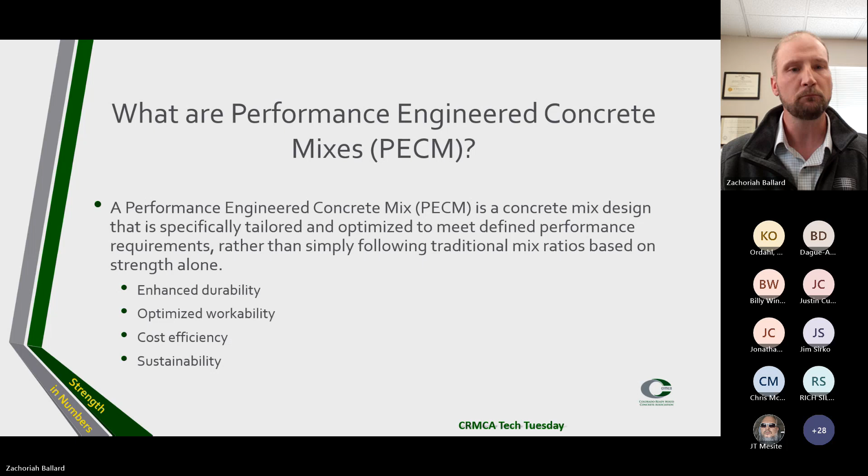So we'll start with the traditional concrete mix design. Generally, we're taking one of these, adding two of these, adding three of these, water to get slump, and we get concrete.

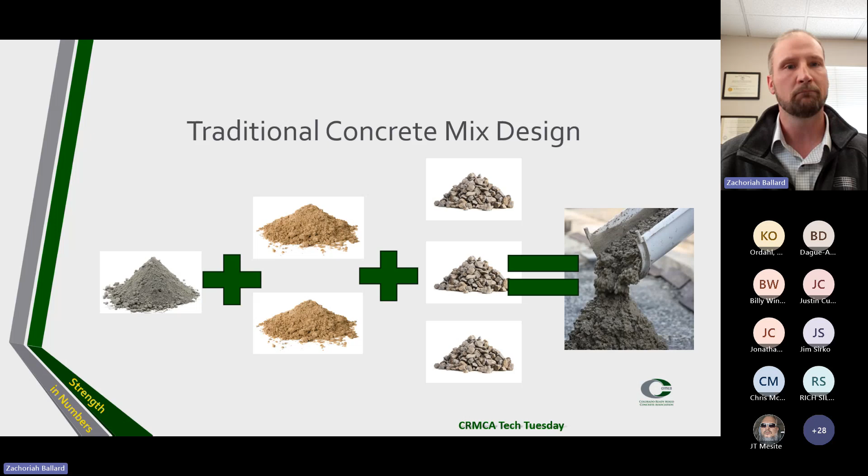We also have our traditional mix design of ACI 211, which is selecting proportions for normal density and high density concrete as a guide. This generally goes through a maximum water cement ratio with minimum cementitious materials, air content, slump, nominal max aggregate size, and strength.

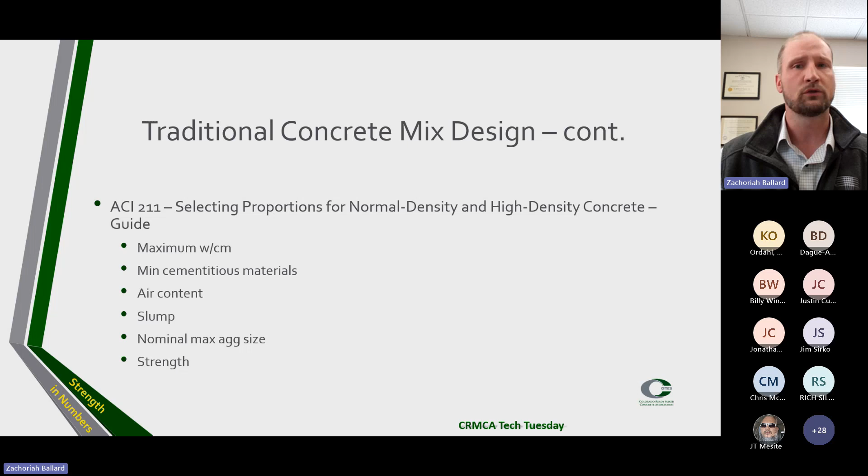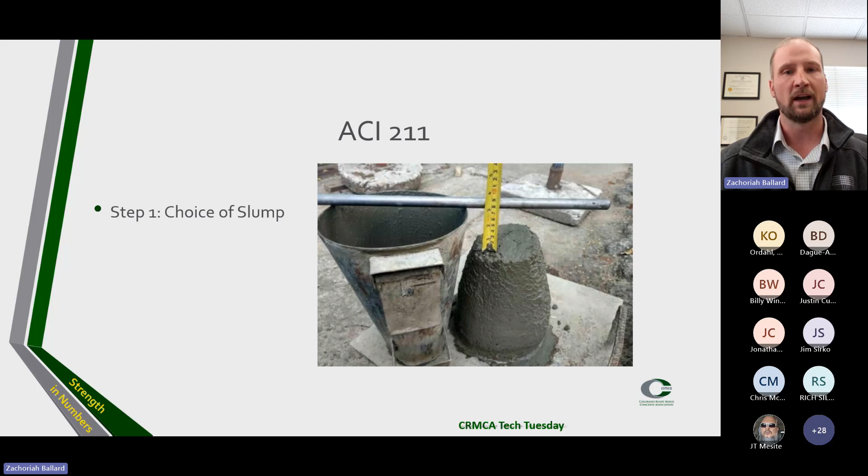So for ACI 211, we're going to go over a real quick, basic introduction of how that mix design process goes. The first step is our choice of slump. If slump's not specified, a value appropriate for the work can be selected from Table 5.3.1 in the document. Those values apply to concrete produced without a water-reducing admixture, and these slumps range anywhere from 1 inch to 5 inches.

Our second step here is choice of nominal maximum aggregate size. Generally, the nominal maximum aggregate size should be the largest that is economically available, consistent with dimensions of the structure. Now understand that most of the suppliers, we don't really have the choice of choosing many different options here, but we may have a couple of options.

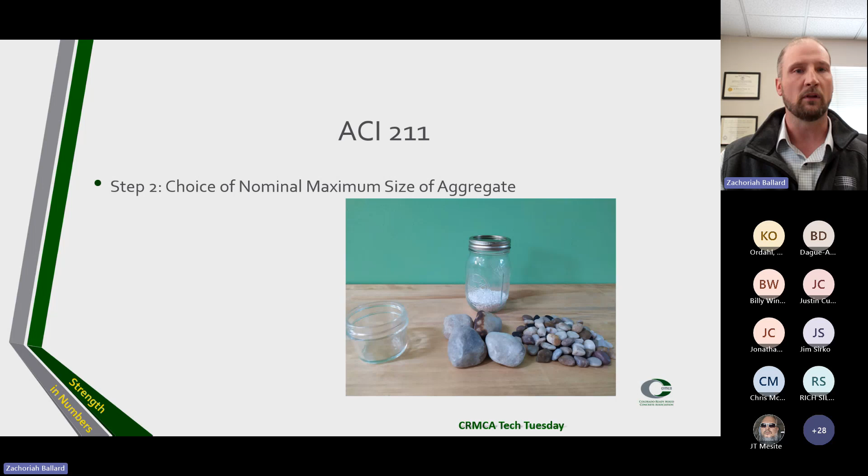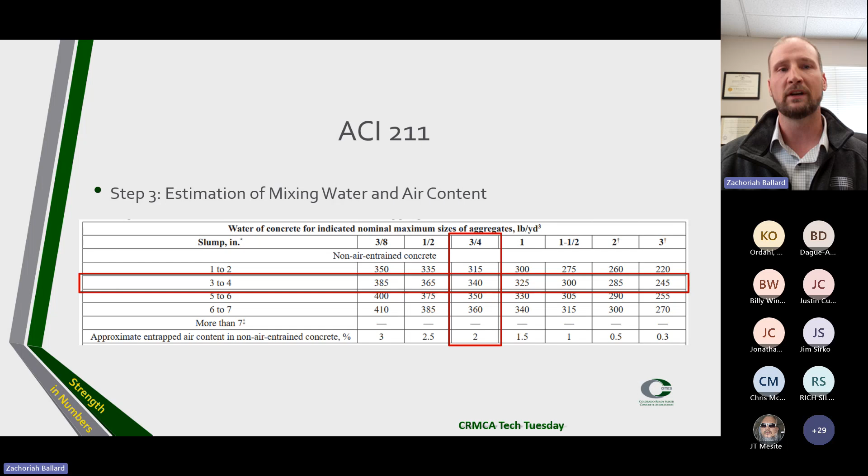So our third step is the estimation of mixing water and air content. For this example, we're going to do the line here highlighted, the 3 to 4 inch slump with a 3/4 inch aggregate. That's giving us a starting water of 340 pounds per cubic yard.

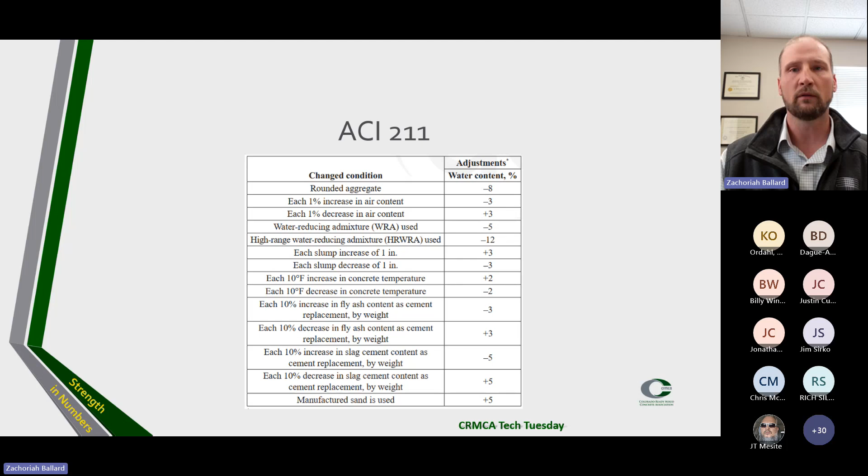We then go to the next table in ACI 211. This gives us adjustments that we can use for rounded aggregates, increases or decreases in air content. We can go through this chart and adjust our mixing water content based on the properties of the materials we're working with. For this example, we're not going to do any of those, but know that that's available to us.

Step 4 is the selection of our water cement ratio. The required water cement ratio is determined not only by strength requirements, but also factors such as durability. Because different aggregates and cementitious materials may produce different strengths at the same water cement ratio, it's desirable to develop the relationship between strength and water cement ratio for the materials to be used.

So our example here, we're going to do a 5,000 PSI concrete, non-air entrained. That gives us a starting water cement ratio of 0.48.

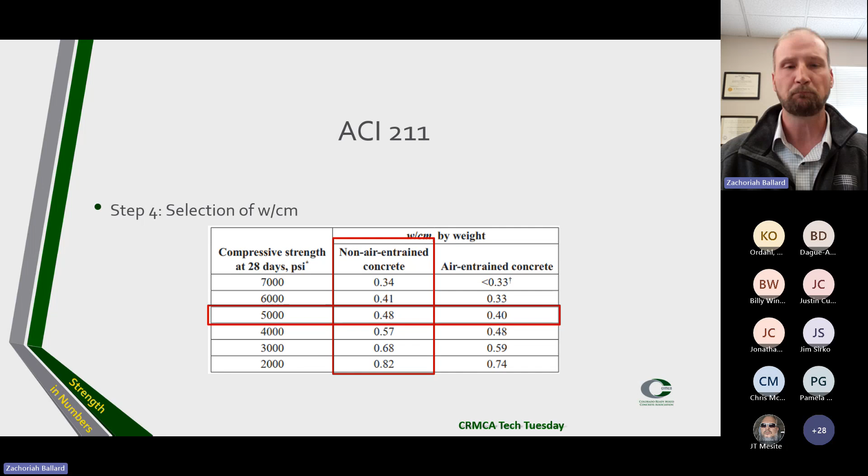Our step 5 is the calculation of the cementitious materials content. So we're going to take that 340 pounds of water, divide it by our water cement ratio, and we get a starting cement content of 708 pounds. The quantity of cementitious materials per unit volume of concrete is fixed by the determinations made in steps 3 and 4, and the required cementitious materials, we divide that out.

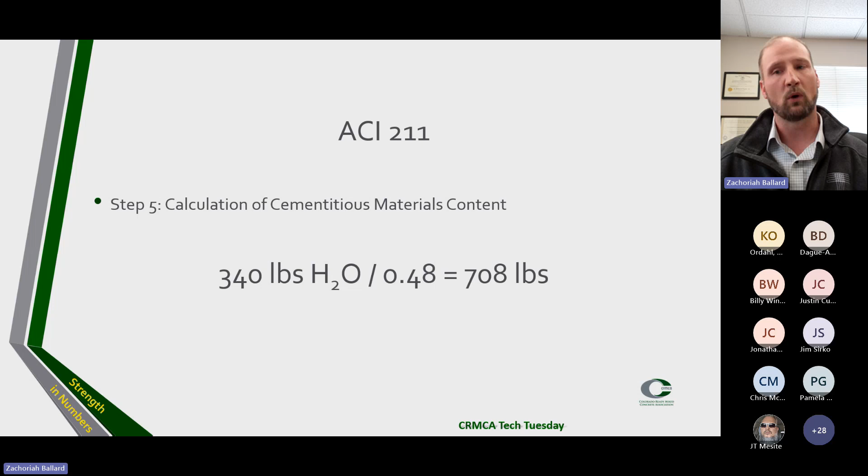If, however, we have a specification that includes a separate minimum limit on cementitious materials, in addition to the requirements for strength and durability, the mixture should be based on whichever criterion leads to the larger quantity of cementitious materials.

So our step 6, estimation of coarse aggregate content. Aggregates of essentially the same nominal maximum size and grading will produce concrete of satisfactory workability when a particular volume of coarse aggregate on an oven dry rodded basis is used per unit volume of concrete. The appropriate values for this aggregate volume are given in Table 5.3.6. The bulk volume of aggregate needed, we're going to use 3/4.

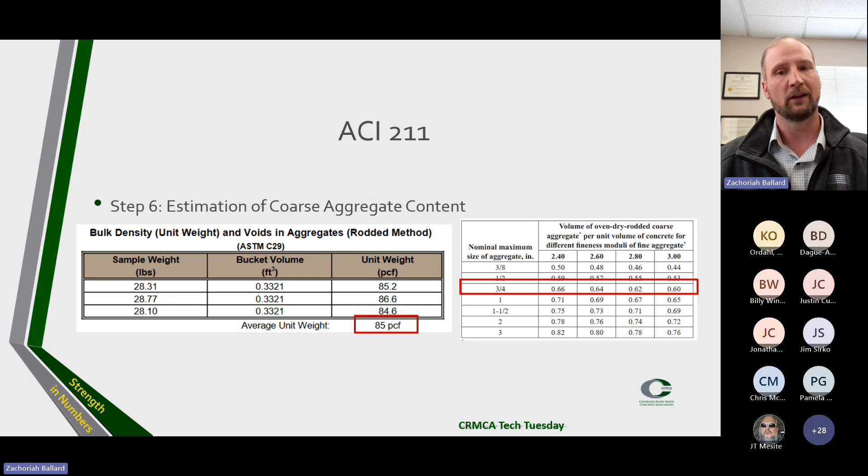This value is multiplied by 27, converted to a dry unit weight by multiplying by the bulk volume. We then convert that to an equivalent SSD weight by multiplying by 1 plus the absorption, using values here of 0.64. So all together, we use our 85 pounds per cubic foot, multiplied by 27, multiplied by 0.64, multiplied by a factor for our absorption, gives us our starting aggregate content for our mix, in pounds per cubic yard.

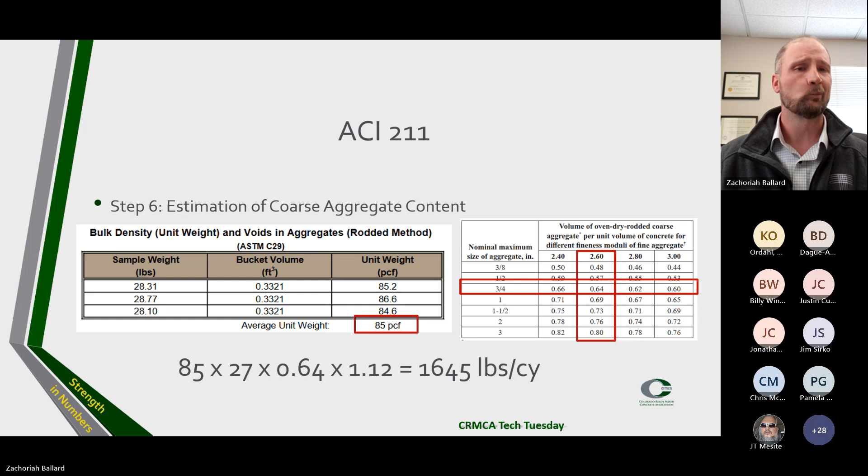Our step 7 is estimation of the fine aggregate content. At the completion of step 6, the weights of all the ingredients of the concrete mixture have been estimated, except the weight of the fine aggregate. Calculating the required quantity of fine aggregate involves use of the volumes displaced by the other ingredients. In concrete, the volume occupied by any ingredient equals its weight divided by the density of that material, the latter being the product of the density of water and the specific gravity of the material.

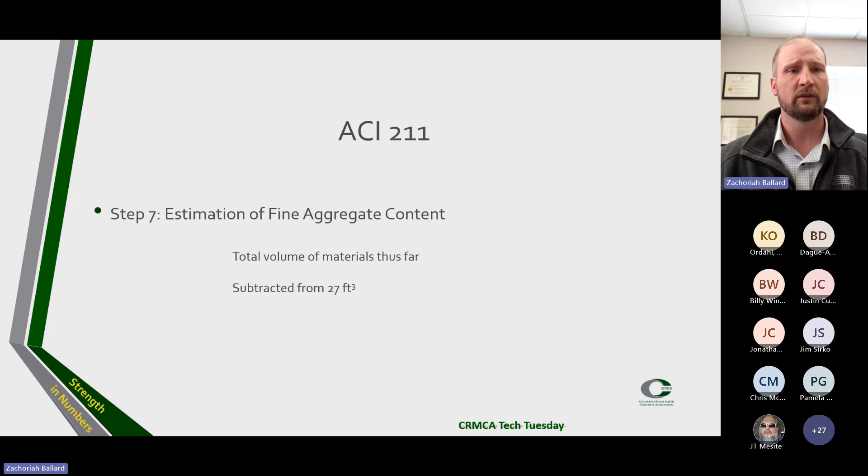For this calculation, the total volume displaced by the known ingredients—the mixing water, the air, cementitious materials, coarse aggregate—is subtracted from the unit volume of concrete, 27 cubic feet, to obtain the required number of cubic feet of fine aggregate. So I saved some of our math here, and our total volume of materials subtracted from 27 equals our required volume of sand, which is 1,170 in this particular case.

So our step 8 is the design weight summary. We have cement at 708, water at 340, coarse aggregate at 1,645, and fine aggregate at 1,170. And that's the mix design we take to the lab.

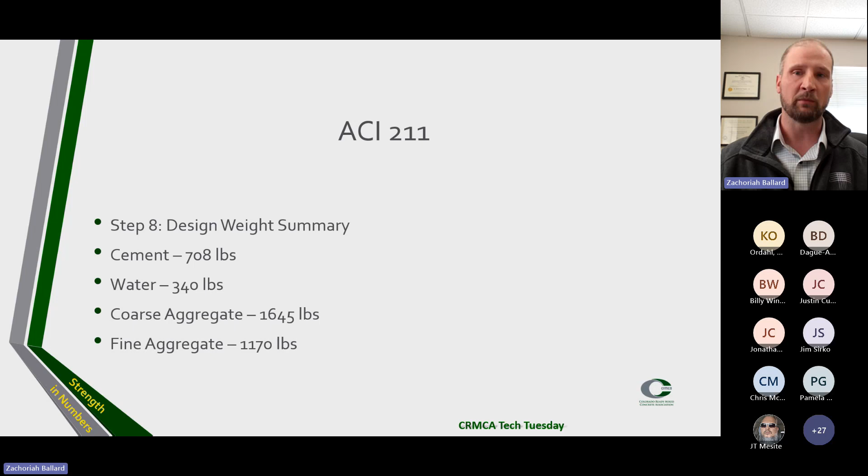Then we need to do it 2 more times at varying water cement ratios to develop a 3-point curve. Using a 3-point curve, we can then pull out a design water cement ratio and interpolate the mixture proportions for our design mix. That looks like: as we come across from our design strength until we hit our strength curve, we drop that down to our water cement ratio at the bottom, and we can interpolate our values for a design mix.

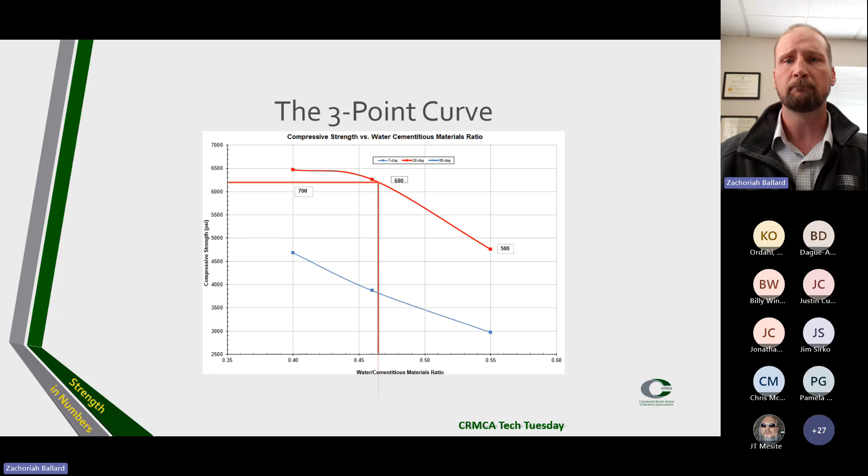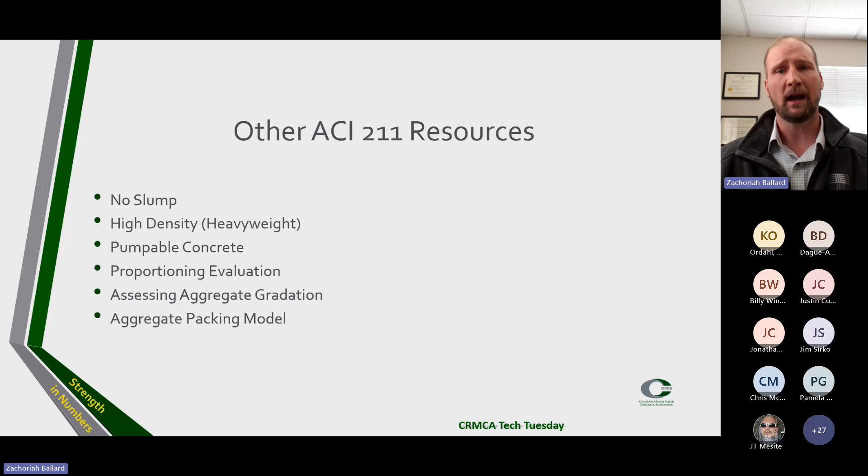Some other ACI 211 resources that we have—I don't want it to sound like the ACI 211 proportioning isn't still valid or the methodology is bad. It's still very useful, and we have a host of other documents we can use as well. We have our no-slump proportioning, our high-density heavyweight proportioning, a pumpable concrete proportioning document, a proportioning evaluation document, assessing aggregate gradations, an aggregate packing model, and proportioning with ground limestone and mineral fillers. I should also mention that lightweight aggregates and proportioning is covered in ACI 213 and ASTM C330.

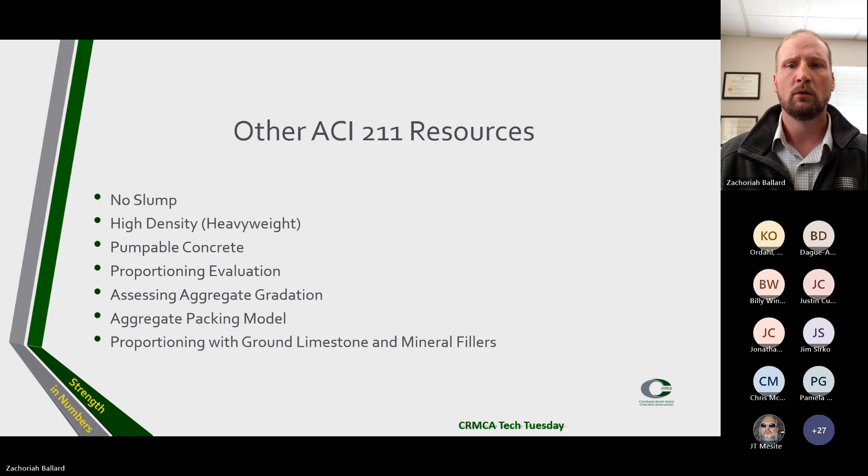So our shift towards performance engineered mixes. We have a demand for improved durability. Modern infrastructure projects require concrete mixtures that can withstand harsh environmental conditions, such as freeze-thaw cycles, aggressive chemicals, and high temperatures. Traditional mix designs often didn't provide the necessary durability. Performance engineered mixes focus on engineering concrete with properties like higher resistance to corrosion, reduced permeability, and improved long-term performance in various environmental conditions.

We have sustainability goals. The construction industry has increasingly moved towards sustainable practices. Performance engineered concrete mixtures allow for the use of alternative materials, industrial byproducts like fly ash, slag, silica fume, etc., that reduce the environmental footprint of concrete production. These materials help reduce the overall carbon footprint, energy use, and waste generated during construction.

We have technological advancements. Advances in concrete testing and modeling have made it easier to predict how different mixtures will perform in real-world conditions. Computational tools and mixed and performance-based testing methods allow engineers to design concrete mixes tailored to specific project needs, leading to the creation of more effective and efficient mixtures.

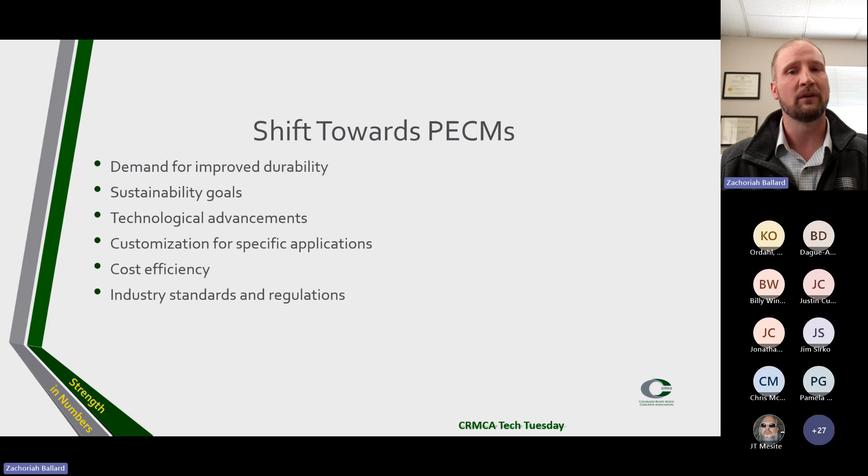Industry standards and regulations. Changes in building codes and regulations have pushed the industry towards a more performance-based approach. As codes and standards become more stringent, especially with regard to environmental and durability concerns, performance engineered concrete mixtures provide

a way to meet these requirements while also ensuring that the concrete structures perform optimally over time.

Focus on long-term performance. There's an increasing emphasis on the life cycle performance of concrete structures. Instead of focusing solely on initial cost or ease of mixing, the industry has shifted towards designing concrete mixtures that

perform better over the life of the structure, reducing the need for repairs and replacements. PECMs align with this trend by ensuring that concrete mixtures meet long-term performance objectives such as longevity and minimal maintenance.

Better understanding of concrete properties. Through extensive research and testing, the construction industry has gained a better understanding of how various materials and admixtures interact to influence concrete properties. This knowledge enables the creation of tailored mixes that achieve desired performance characteristics, such as workability, strength, durability.

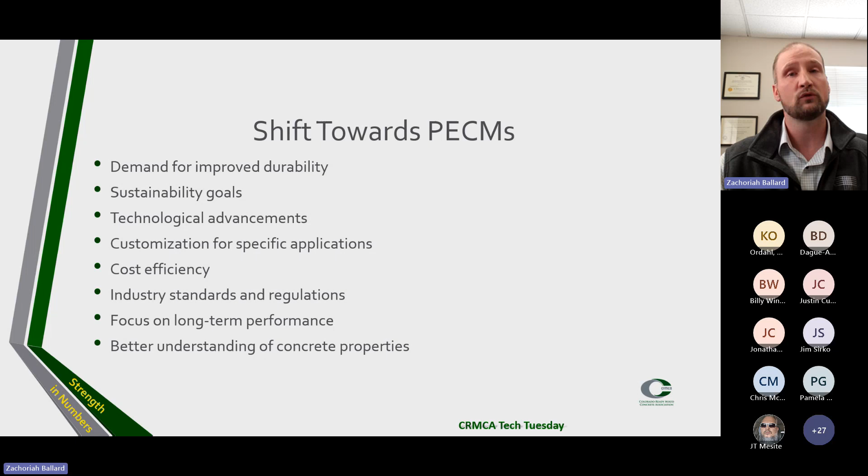So we'll go into composition and ingredients. Our cementitious materials or fillers: fly ash, slag, silica fume, natural pozzolans like clay or calcined shales, ground glass pozzolans, limestone powders, ceramic waste powders, biochars. We've got a lot of different options.

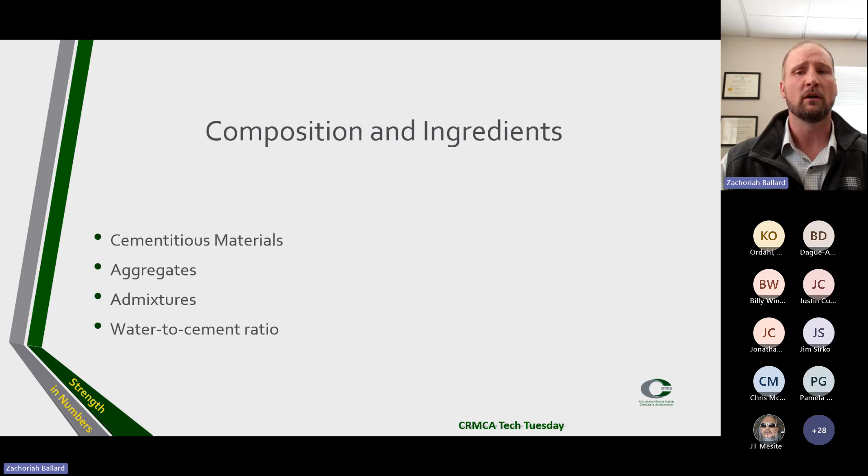We've got aggregates - the importance of aggregate quality, size distribution, and shape in mix performance. Admixtures: water reducers, high-range water reducers, kind of the low range are retarders, superplasticizers, set accelerators, viscosity modifying admixtures, the list kind of goes on - waterproofing admixtures, pumping aids, etc. And still our old standby, the water cement ratio and its impact on our workability, strength, and durability.

So before we delve into different types of materials, we want to discuss a little of our typical batch plant and some of the constraints. We can see a simplified schematic of a concrete batch plant. We've got powder silos on the left side of the screen, and we've got our aggregates on the right side. Many of these plants, I'm sure that many of our suppliers are using, generally have 2 to 3 silos, 2 to 3 aggregate bins. So we have some constraints that we're also working with here.

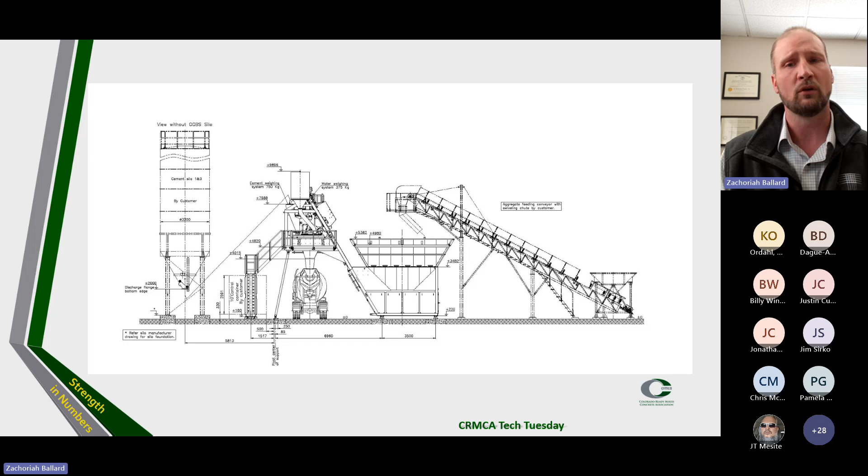It would be nice to be able to put 5 to 10 of those powders that we just talked about, or a multiple amount of aggregates in our plant to be able to use these however we want. But that's just not the reality of what we're dealing with. We do have some ability - the little platform above the concrete mixer truck there, I'm sure most of us have been in a situation where we've stood on top of those and loaded mixers with different materials by hand or by small materials, but that's not generally a long-term or sustainable solution for something that we're going to have to do for a couple hundred yards a day.

So our cementitious materials - we've got cement and fly ash and blast furnace slag and silica fume and natural pozzolans and ground glass pozzolans, limestone powders, ceramic waste powders, biochars. We have many different options when it comes to powder materials, whether it be from cementitious materials, supplementary cementitious materials, which provide some pozzolanic reaction, and mineral fillers.

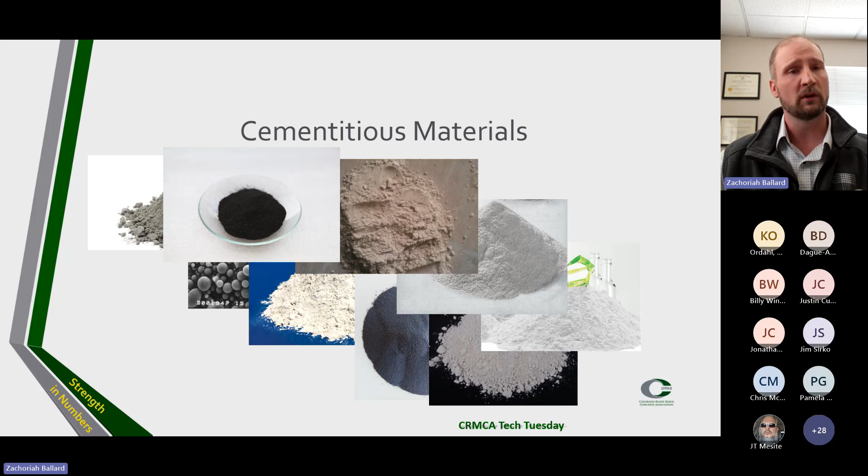So our space in the concrete plant certainly cannot accommodate every single one of these, or even a multiple of these. And some of these may not even be available in certain markets. So we may end up with some of our cement industry folks blending some of these materials for us and being able to provide cements that look more like the European model, where instead of having a handful of cements, we may end up with a multitude of cements with different materials blended into each of these. And we're starting to see some of this go on already, where we have our 1T or 1P type cements. But it may not be a real option for many of our plants to have multiples of these options.

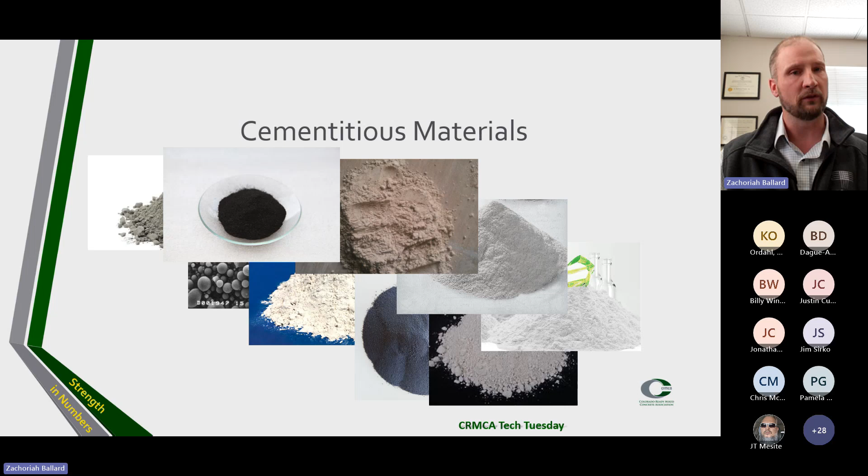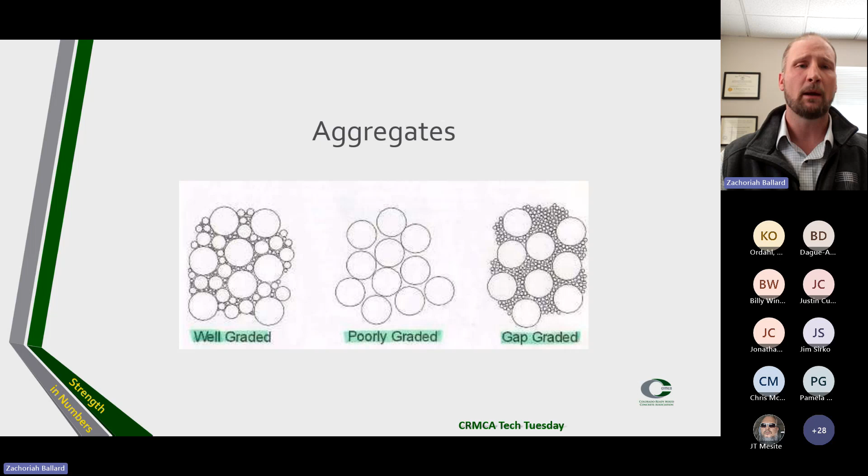We also have aggregates. And we've got our well-graded aggregates, our kind of well-distributed size of aggregates. We have poorly graded aggregates. We have gap-graded aggregates. Our gap-graded aggregates is kind of where our traditional concrete mix design tends to live.

We have our requirements by ASTM C33 that gives us a certain size range that say, number 67 rock can meet. We have a certain size range that our sands can meet, and generally those two materials put together give us a gap-graded aggregate. Our performance concrete mix designs are going to use more of a well-graded aggregate or a better distribution of aggregate sizes.

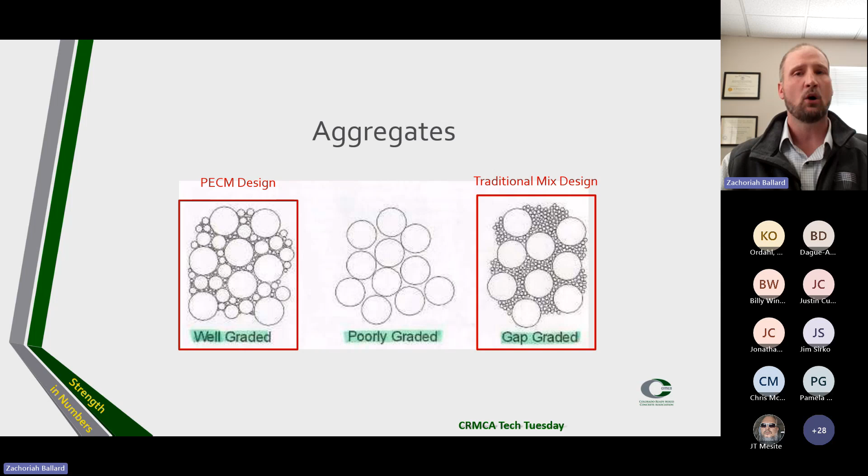There's a lot of different research out on how we can combine these materials. One of those being a coarseness factor, workability factor chart, or kind of the Shilstone workability chart. And this started kind of in the late 1980s or so.

James Shilstone revealed a mixture design process based on the proportioning of aggregates using a combined gradation to proportion a group of sieve sizes that can be categorized as coarse, intermediate, and fine. He designed a chart and proportioning equations from about 20 mix designs based in Saudi Arabia, and confirmed the chart and equations using aggregates from the Dallas, Texas area.

From Shilstone's experiences, he determined the workability can be sufficient in certain areas of the chart, and divided the chart into zones - we have zone 1, zone 2, zone 3, zone 4, and zone 5.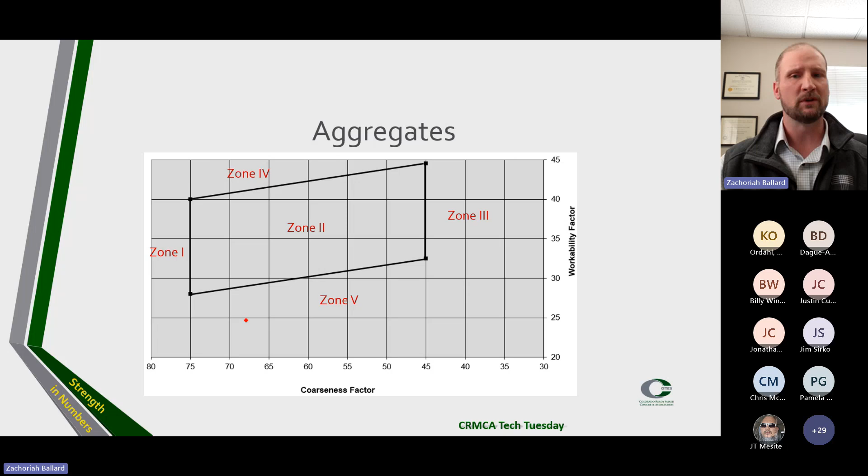So we plot our aggregates based on a coarseness factor and a workability factor. These are generally just materials retained on the 3/8 sieve, a number 8 sieve, and material passing a number 8 sieve, and our cementitious content. It only uses a handful of factors from those, and our zones give us different qualities about our concrete mix designs.

Our zone 1 is supposed to be our gap graded, with very little amounts of intermediate aggregates. Zone 2 is supposed to be our well graded aggregates, in what he called an optimal gradation for concrete mixture design. Zone 3 has a large majority of intermediate with very little coarse aggregate. Zones 4 and 5 correlate to the extreme sandiness and rockiness ends of aggregate gradations.

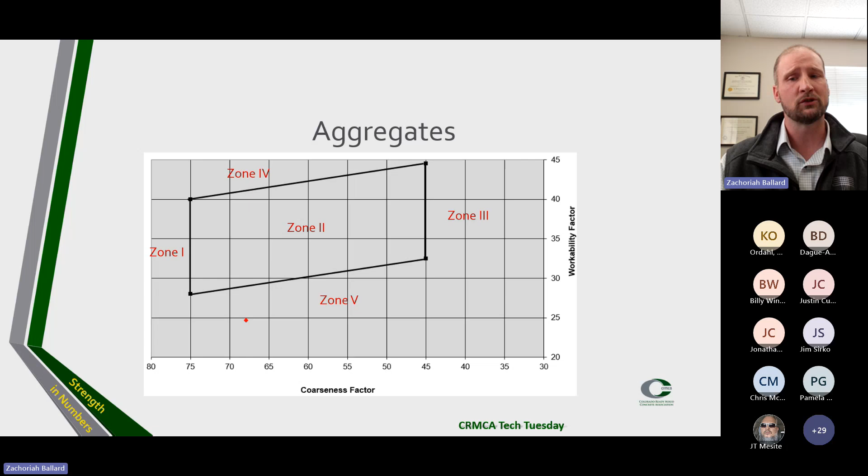A large focus has been used on multiple regions of zone 2 for certain applications, and many DOTs are using this for aggregate proportioning in slip-form pavements. However, Shilstone suggested the bottom of zone 2 is best in that zone. Unfortunately, very little testing has actually been published by Shilstone or others to validate this chart.

We've got our haystack curve, or individual percent retained chart. This is a method for evaluating the exact distribution of each sieve size on an individual percent retained basis. The chart easily shows the excess or lacking of sieve sizes of a combined gradation.

From experience, people have specified a maximum boundary of somewhere in the range of 18 to 22%, and a minimum boundary of 5 to 12% retained on each sieve. No real research has been conducted to prove those limits, but that's what we've found generally works.

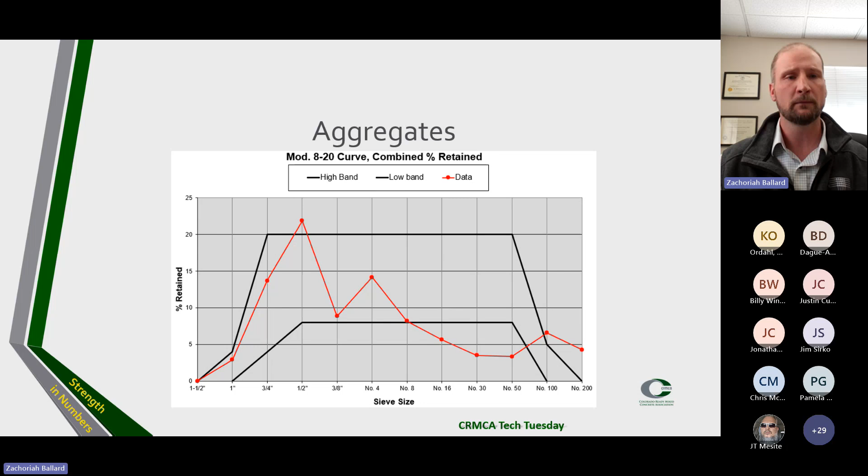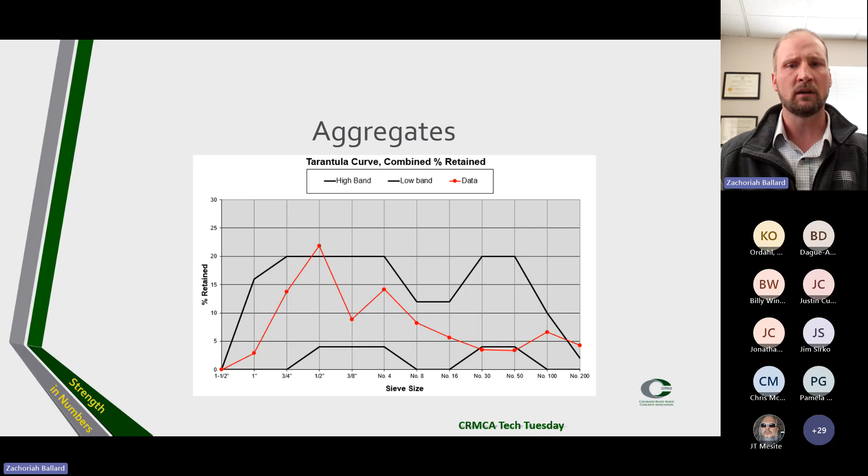We have our modification from that haystack curve to the tarantula curve. Our tarantula curve was modified - this was done by Tyler Ley and his team at Oklahoma State. This work has had quite a bit of research done around it, around 2010 or so, somewhere around in there.

We also have our Power 45 curve. This started in the concrete industry around 1907, and is now used primarily by the asphalt industry. The Power 45 curve uses a combined gradation fit to a best fit along a straight line on the cumulative percent passing chart. This was done by Fuller and Thompson in 1907. The straight line from the origin to the nominal maximum size is thought to represent a maximum density combined gradation, which supposedly creates the maximum density and a minimum amount of voids in a mixture.

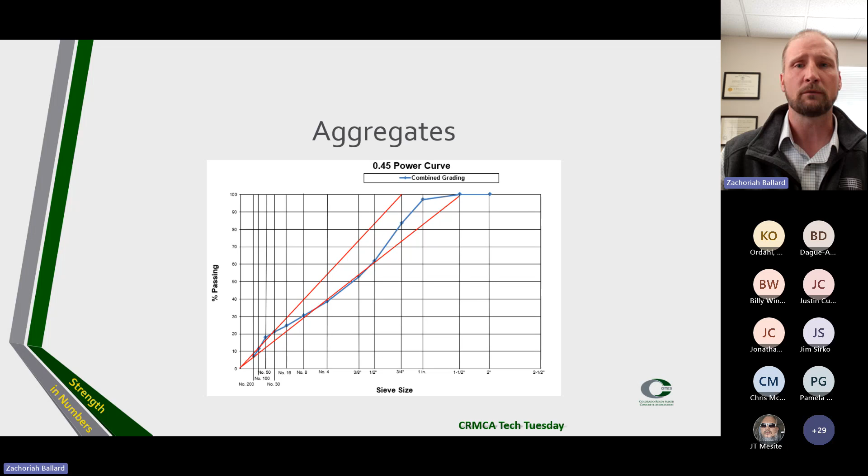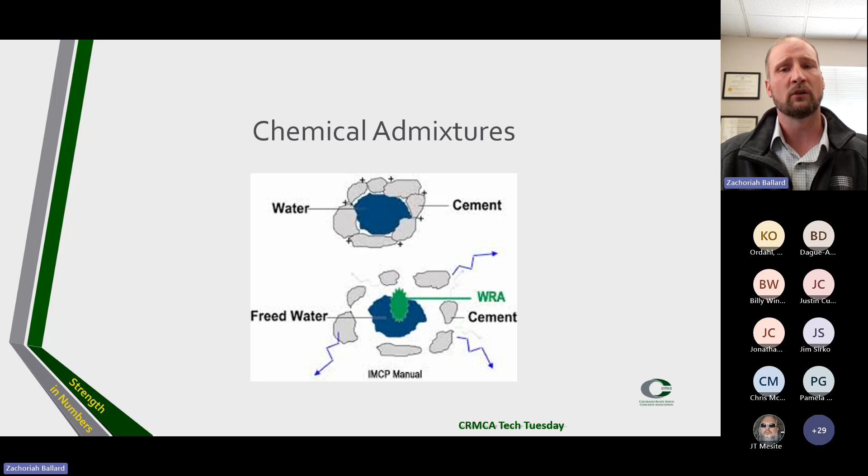Let's delve into our chemical admixtures here. We have a traditional view that chemical admixtures have always been used to reduce the water, which makes our concrete stronger, more durable, and overall just more is better, right? But what we're missing here is we're not talking about sticky concrete or potential slump loss.

We have some charts, generally by admixture suppliers, that show if we have a high range water reducer on the left, we get a larger amount of water reduction, but the time that slump stays is not as long. We have some slump controlling admixtures and slump retaining admixtures, but those are generally not going to give us the same high water reduction values. So as we push admixture dosage higher and higher and reduce our water lower and lower, we're going to start to run into some problems.

If we hit it at the batch plant, we have high water reduction, slump looks good, but if we have high slump loss at the job site, we're just going to add a bunch of water right back into it, and we're going to defeat the purpose of having these admixtures and going through this exercise of the performance engineered mixes.

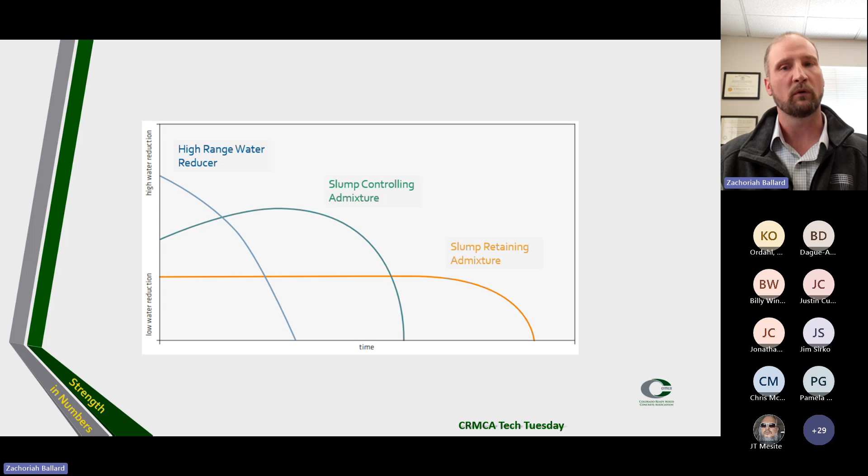So quick background on some of our polycarboxylate ether-based superplasticizers. It's a targeted polymer design to specific concrete properties.

The mode of action is based on the adsorption of the polycarboxylate onto a cement grain, dispersion of particles by electrostatic repulsion, and steric hindrance.

The polymers consist of backbones with carboxyl groups and side chains. The backbone with the carboxyl groups is responsible for the attainable water reduction and initial slump mixing time respectively. The side chains determine the slump keeping capability of the superplasticizer, affected by an increasing number of side chains.

The crucial factor is the limited space for these carboxyl groups and side chains along the backbone. Either a carboxyl group or a side chain can be attached to a certain location. Basic variations in those factors lead to three generic types of polymers: water reducers, slump control, and slump retaining type polymers that we just talked about.

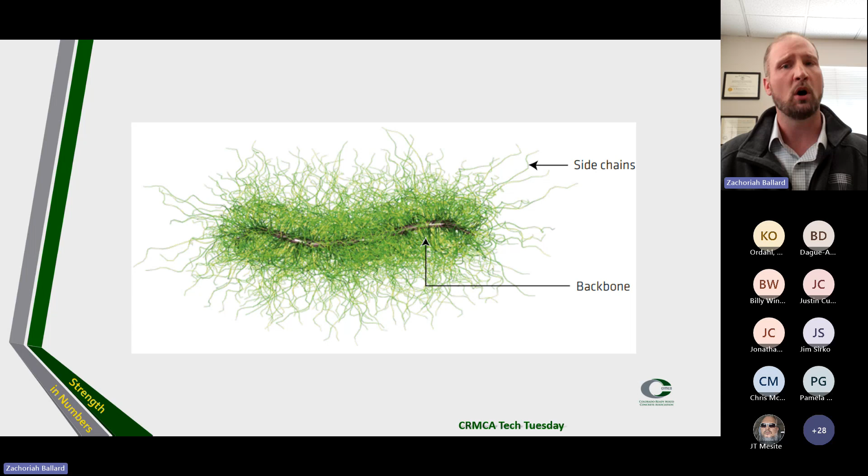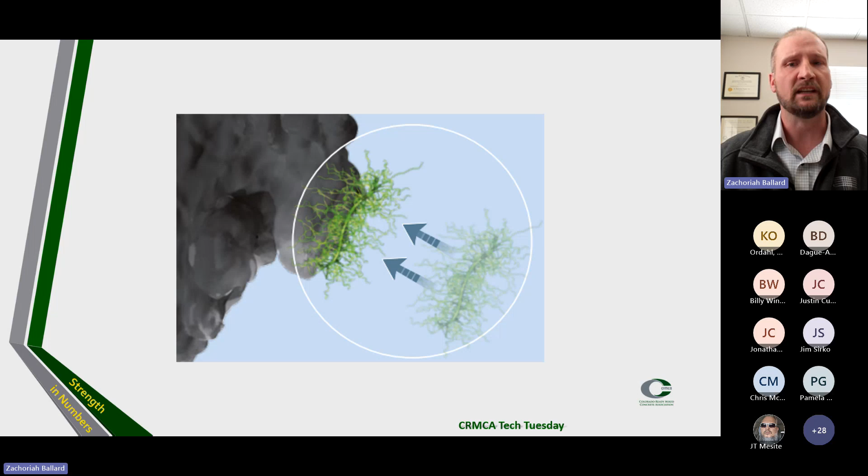So we get the adsorption of the polymer, the backbone, onto our cement grain. This is a detailed view of that adsorption of the polymer onto the cement grain.

The improved workability is due to steric hindrance. Steric hindrance is a slowing of a chemical reaction due to what's called steric bulk. It's usually manifested in intramolecular reactions, and discussion of steric effects often focuses on intermolecular interactions. Steric hindrance is often exploited for controlled selectivity, such as slowing unwanted side reactions like crystalline growth from cement hydration.

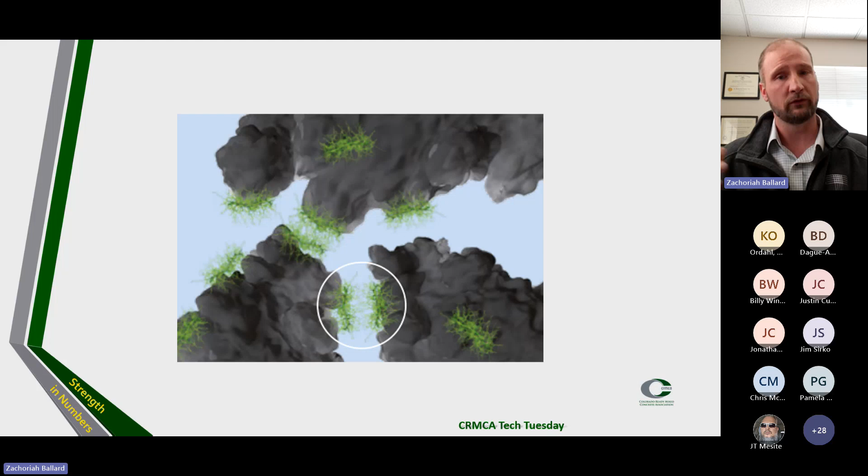This is a detailed view of improved workability. It's going to push those two particles apart without having to add water into the space between them.

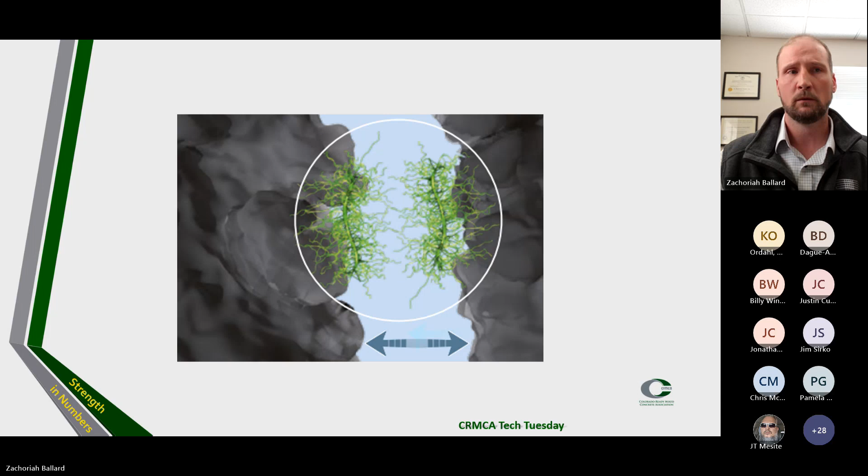So why is all of this important? Well, we understand the materials that we're working with, and we can better understand how to make adjustments with those materials for various outcomes.

We get key performance indicators, things like compressive strength, flexural strength, modulus of elasticity, durability factors like permeability, shrinkage, freeze-thaw resistance, and our various test methods and standards. We have various ASTM, AASHTO, and ACI test methods, including non-destructive test methods.

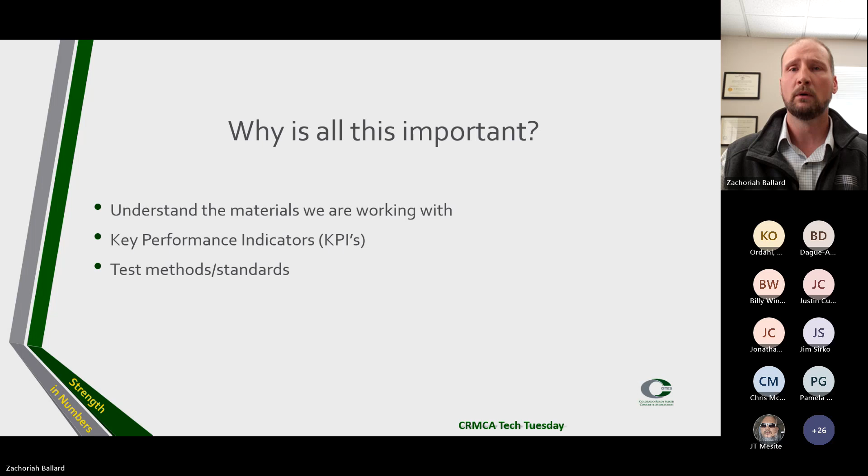We can't control what we don't measure. Compressive strength is a good example - we all generally test and track compressive strength. This can and maybe should be done with other parameters as well, like shrinkage or permeability through surface resistivity or RCP, maybe rheology or stickiness.

Our normal distribution of test results gives all of the test results possible depending on a coefficient of variation. A higher coefficient of variation gives us a wider range of results. If we have a tighter coefficient of variation, we have a narrower group of expected results. Each one of these curves on the screen here is shifted off to the right side, so our mix is designed for a higher strength than our specified strength.

If we can dial our mixes in and improve our quality control on these mixes, we can actually start to push these curves to the left and closer to our specified strength. So now we can spend a little bit less on materials potentially. Each one of these curves is still giving us approximately the same failure rate, around 5 to 10%, which means we expect to get some low strength values. That's how a normal distribution of results works.

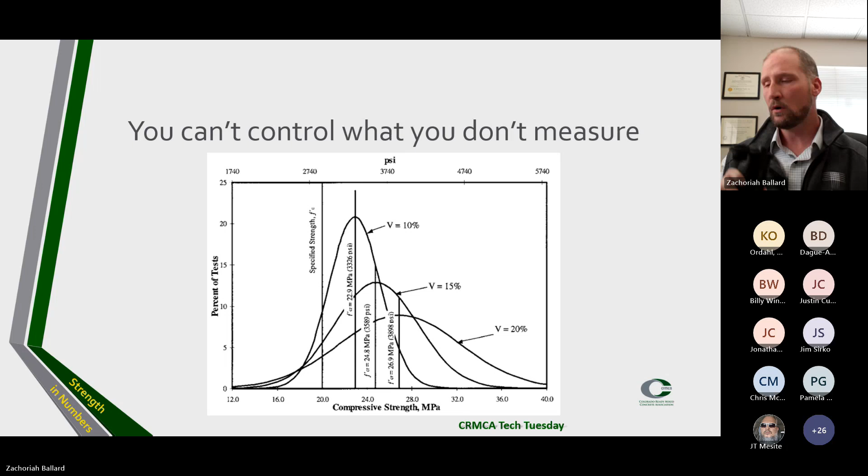We'll go over a quick example. I pulled these specifications from a particular project that I was working on. We've got design mixtures, and each concrete mixture must submit alternative mix designs, characteristics, and materials for project conditions, and all the things that the specifications say.

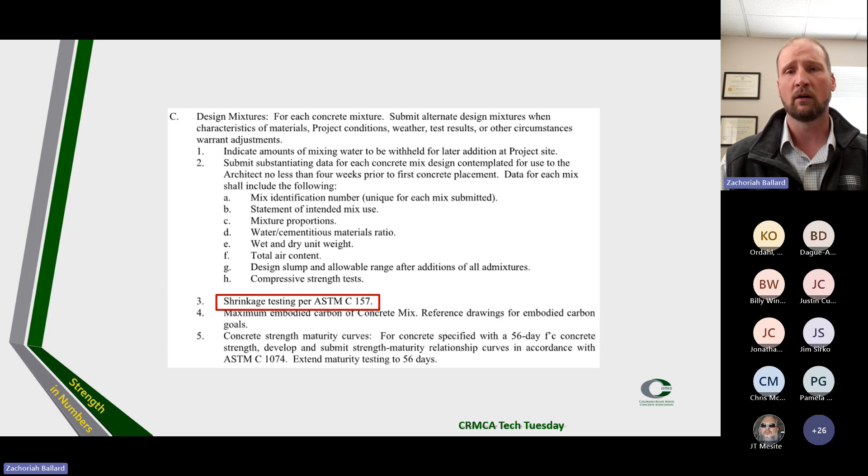Our shrinkage testing per ASTM C157 - maybe not necessarily something that's always tested on our concrete mix designs coming out of our producers, but it provides an opportunity for a performance engineered mix.

We also have a maximum embodied carbon of the concrete mix, with reference drawings for embodied carbon goals. We're not going to get into that part of it, but this is another opportunity for performance engineering mixes.

And our strength maturity curves - for concrete mixes specified with a 56-day strength design, develop and submit these strength maturity relationships in accordance with ASTM C1074, extending this maturity testing out to 56 days.

Not every supplier has all of these things sitting on the shelf ready to go, but if we have a handful of performance mixes, getting these types of specifications might be a little bit easier.

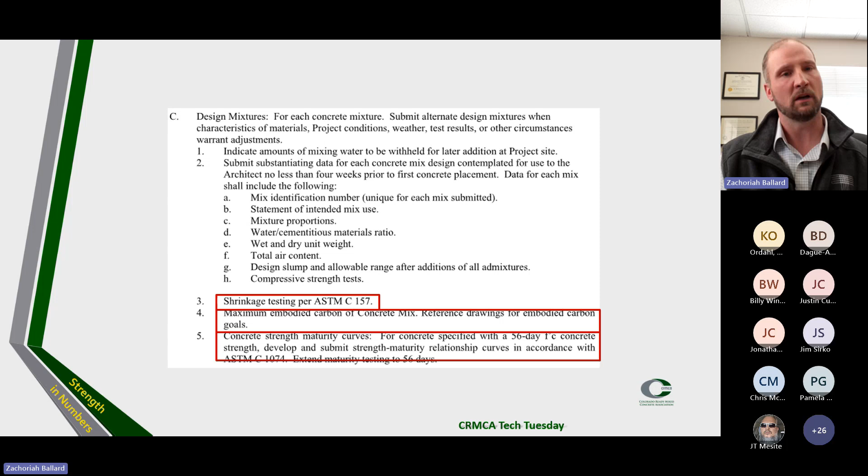So further into those specifications, we have performance and design requirements. We'll focus specifically on the shrinkage, where we have concrete for slab on grade placed directly on vapor barrier at 0.046%.

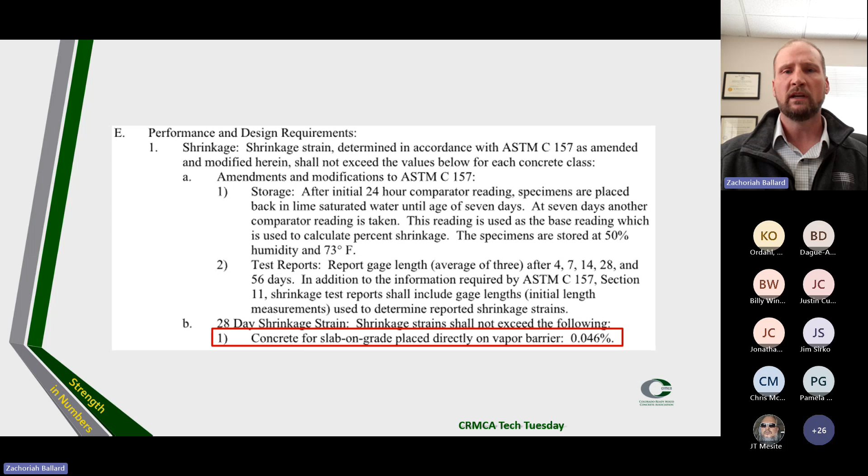So as we get into these, we've got some concrete mix design tools at our disposal. We have various computer-based programs like Stadium, the Concrete Mix Evaluator, Civil Lab. We have phone apps, AI and machine learning programs, and the old standby of spreadsheets, depending on how you want to run with it. There are many options out there. This isn't an exhaustive list or recommendation, just to show we have lots of options available. Honestly, pick one that you like and run with it.

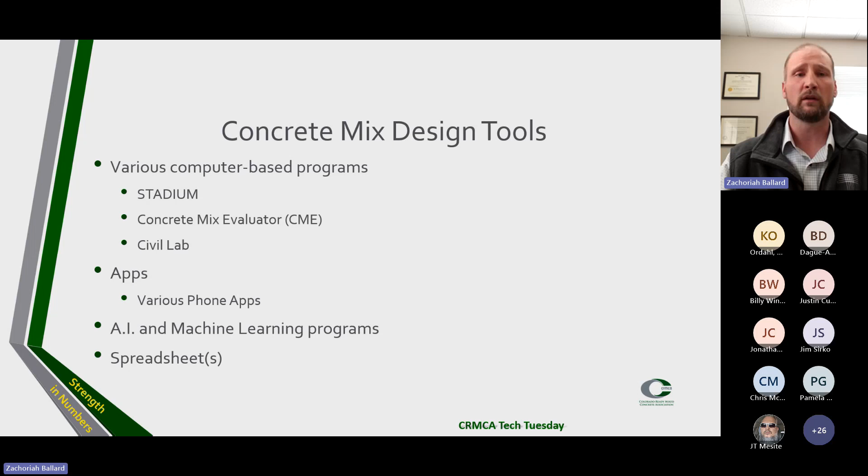We will use those to go in and do a design of experiments. The design of experiments method allows our quality teams to simultaneously investigate multiple potential causes of process variation. Experimental design begins by identifying the major factors that could cause process variance. The design of experiments tool contains three elements.

For example, we'll use this on the process of making a pizza, and the elements are the following. We have our factors, or controllable and uncontrollable variables. These are the inputs to our process, considered either controllable or uncontrollable. Factors in the pizza example include the oven, the dough, the sauce, the toppings, etc.

We have levels, which are the settings of each factor, the potential settings. The levels in the pizza making process are like the temperature of the oven, cooking time, and the amount of sauce and toppings used.

And we have our response. This is the output of the experiment. The DOE strives for a measurable output that is influenced by the factors and their differing levels. The response or output from the example is how the pizza tastes.

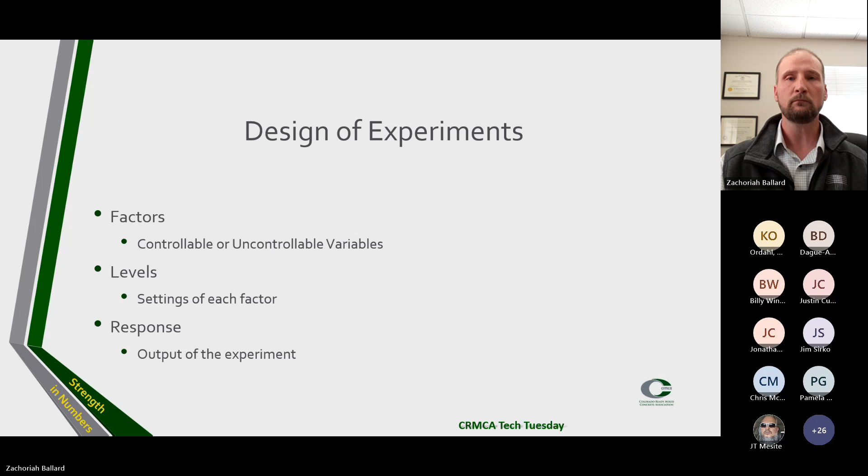Back to the concrete example. There are a number of inputs in the process that can affect the output. Factors most relevant to the end result are the ones most important to the DOE. These factors are selected by the project team in a brainstorming session, for instance. In ordinary circumstances where time and budget are finite, which is where most of us live, the team should limit the experiment to 6, maybe 7 key factors at the most.

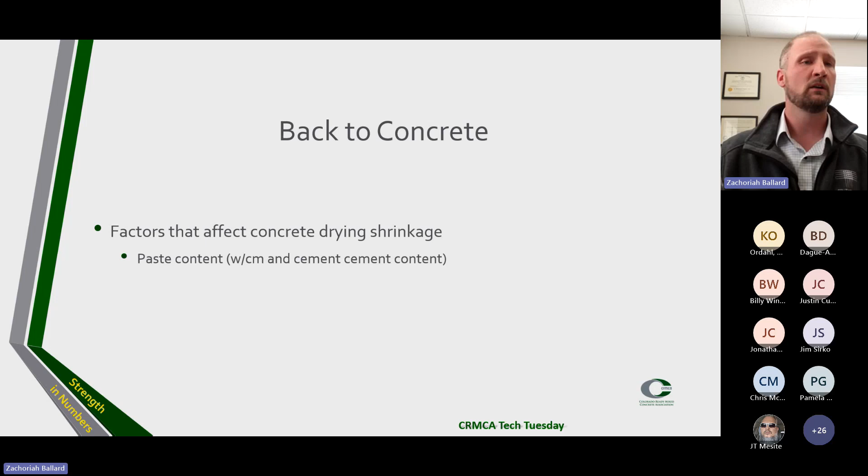These factors are controlled by setting them at different levels for each run. So the factors affecting our drying shrinkage: paste content, water cement ratio, cementitious content, our aggregates - type, size, shape - and admixtures, both positive and negative potentially.

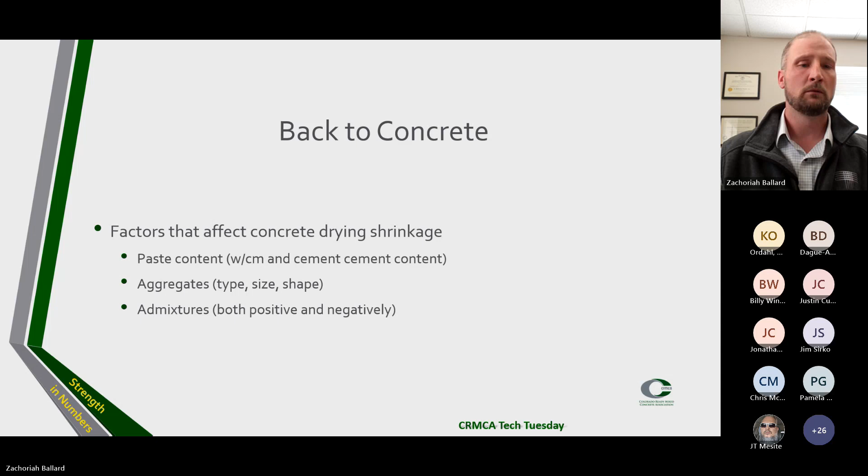Once these factors have been selected, the team must determine the settings at which these factors will be run for the experiment. The pizza example demonstrates that some factors are measured in numbers, such as oven temperature and cooking time. Other factors are more qualitative, such as which toppings are used, measured in categories, converted into coded units for linear regression analysis. Think compressive strength, shrinkage, things like that for us in the concrete world.

The more levels identified for each factor, the more trials will be required to test these levels. To ensure an optimal number of levels are selected, focus on a range of interest. This range includes settings used for a normal course of operations and also may include more extreme scenarios. The greater the difference in factor levels, the easier it becomes to measure the variance.

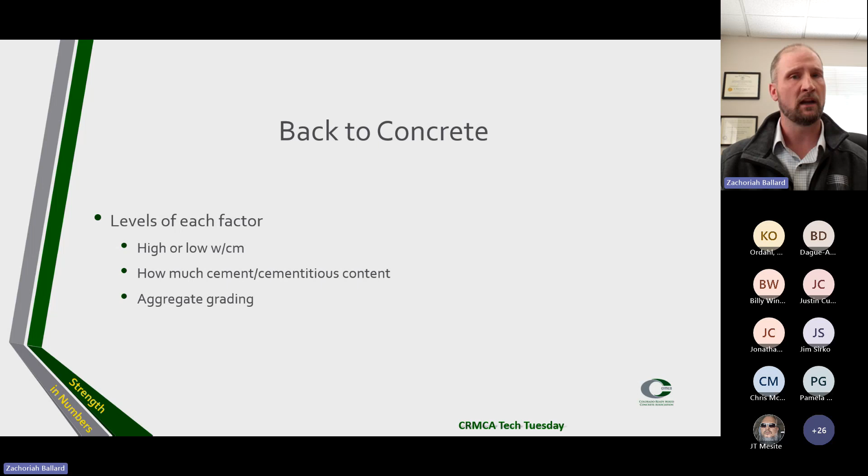So we have high or low water cement ratio, how much cement or cementitious content we have, how our aggregate grading can affect these results, and our admixture dosages - water reducers versus shrinkage reducers - and how we're going to use those in the concrete mix design experiment process.

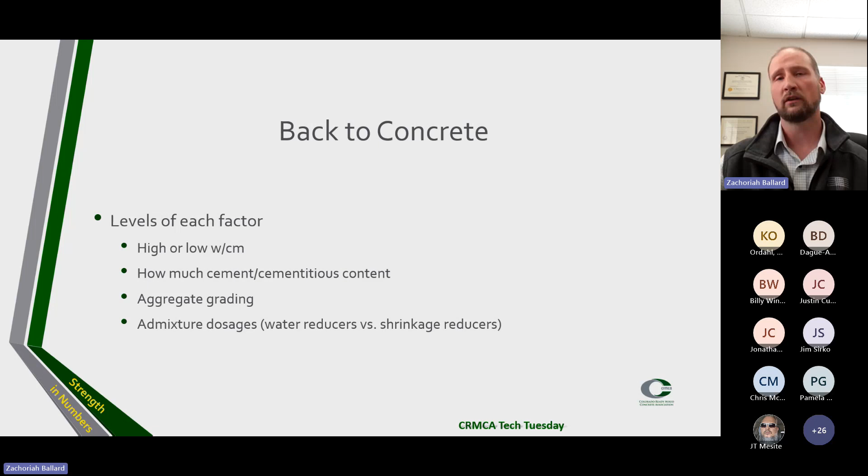So the response is the outcome of the experiment. Outcomes are most helpful in improving the process when they can be measured in quantitative terms rather than qualitative attributes. A response that is quantifiable makes the experiment well suited to additional scrutiny through statistical regression analysis or other mathematical ways of looking at the data.

The design of experiments allows those inputs to be changed to determine how they affect the responses. Instead of testing one factor at a time while holding others constant, the DOE reveals how interconnected factors respond over a wide range of values without requiring testing of all possible values directly. This helps the project team understand the process much more rapidly. So did we have a shrinkage increase? Did we have a shrinkage decrease? Did we have no change?

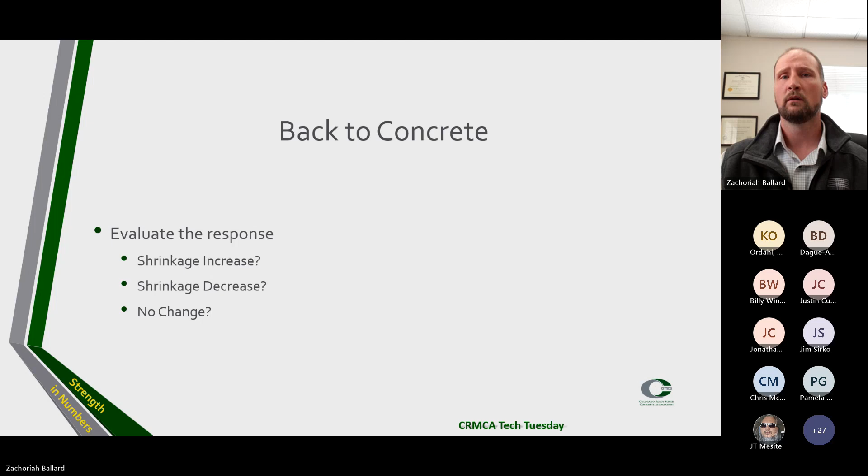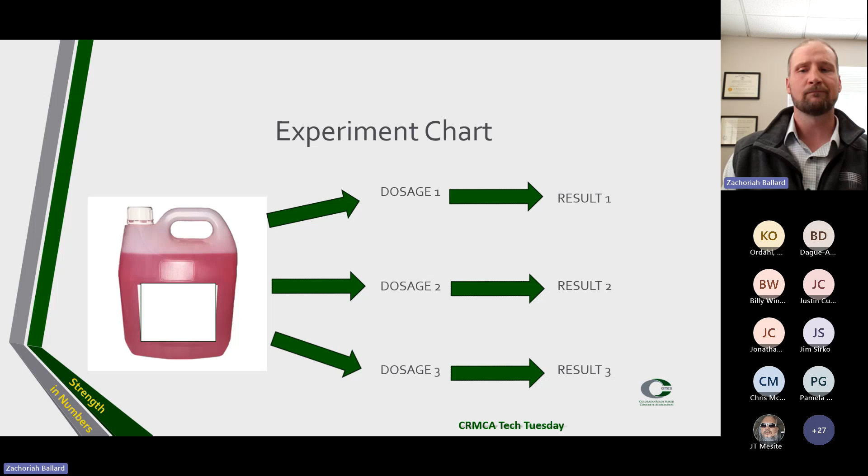I can tell my experiment chart didn't show up well here, but we're going to take this shrinkage reducer, no particular brand, and go through 3 different dosage ranges: dosage 1, dosage 2, and dosage 3. The goal is to get 3 different results: result 1, result 2, and result 3. For our examples here we don't need any particular result, but we're going to analyze each one.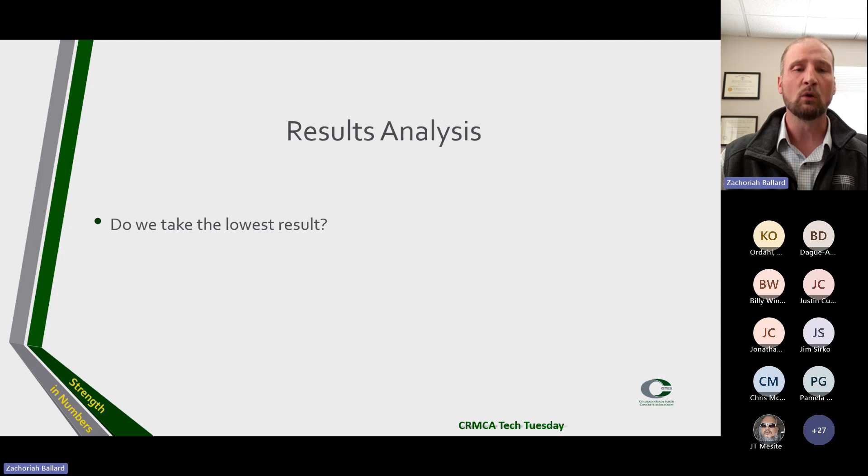So do we take the lowest result? Well, maybe, depends on the result. If we had results ranging from 0.45 down to maybe 0.30, we really only needed to be below 0.46 in this performance engineered mix, so we may not need the absolute lowest value. We want to evaluate those results, comparing back to what we were after for the performance engineered mix.

Can we evaluate multiple variables in this? Yeah, more care needs to be taken in evaluating experiments when more than one variable is involved. But through careful experiment design and analysis, we can evaluate multiple variables, potentially combinations of shrinkage reducers, aggregate gradations, and potentially water-cement ratio.

Do we need to redesign the experiment? If we're looking for results that meet a certain criteria and the results didn't meet those, then yes, we will need to redesign the experiment. If there are opportunities to further optimize based on those results, then yes, we'll need to redesign the experiment, change some of those factors, inputs and levels, and rerun and go through this process again. So this is a cyclical process.

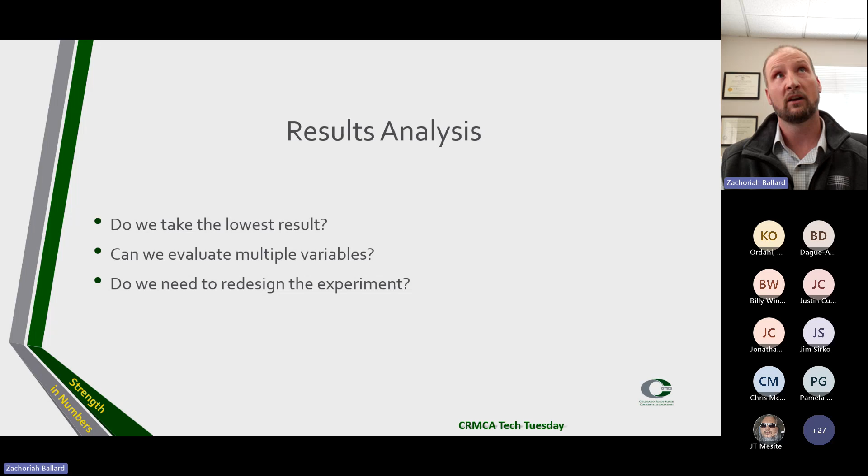So our applications for performance engineered concrete mixes, different locations, what we can do with these mixes and where we can go. We have infrastructure projects, which are our bridges, tunnels, highways, and dams. We have our commercial and residential construction, potentially high-rise buildings, parking structures, or even foundations. We also have our specialty projects, some of our airport runways or marine structures, potentially industrial floors.

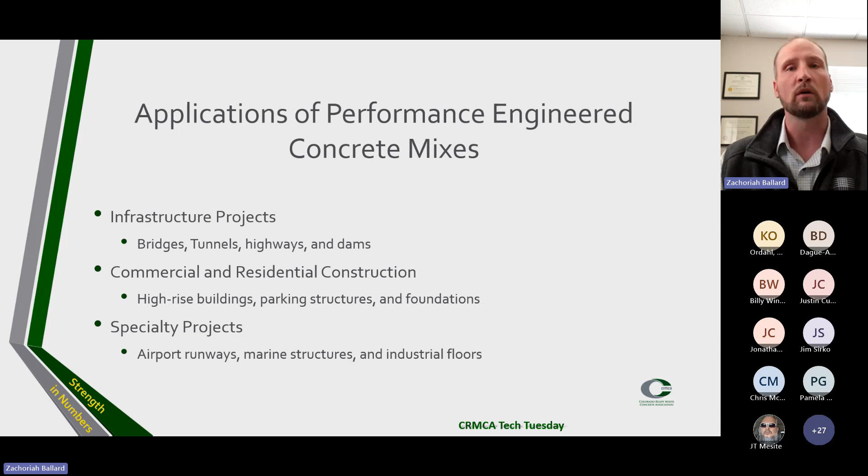The advantages of our performance engineered mixes: we have tailored solutions for specific needs, the ability to meet unique requirements for various types of projects. Enhanced lifespan of structures, with improved resistance to wear and environmental conditions. Better workability and placement, achieving desired consistency and ease of handling in the field. And our cost effectiveness in the long term, so reduction in maintenance and repair costs.

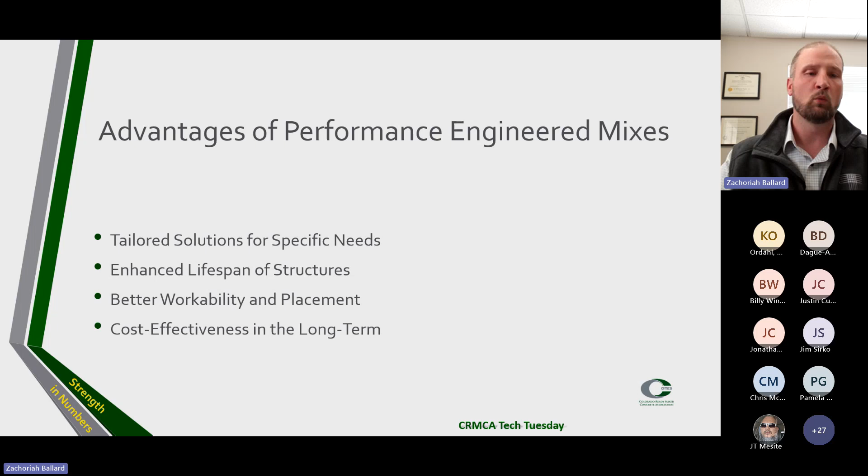We've talked a little bit about this cost efficiency and cost effectiveness, and we're going to get into the challenges of implementation. One of those is going to be cost potentially. But we do have mix design complexity as a challenge; we need expertise in creating and testing optimized mixes.

We also have material variability that we're dealing with, these differences in locally available materials. I think anybody that's made concrete at any time can say that the materials are never super consistent, and we're always having to work through this material variability.

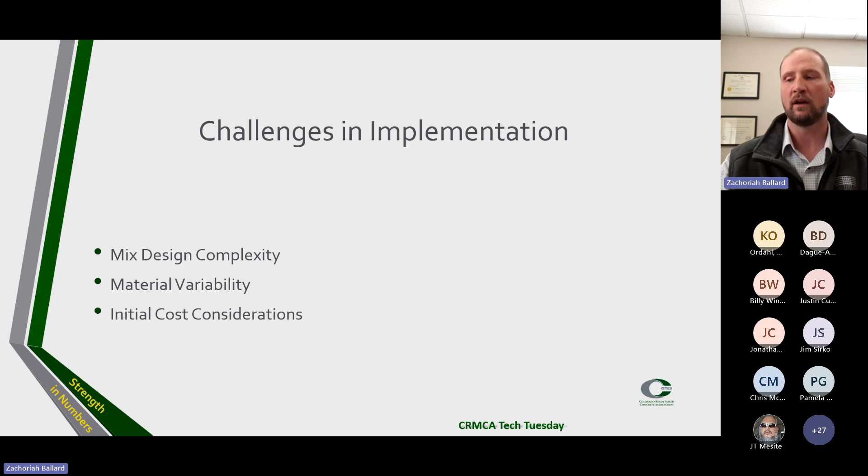And our initial cost considerations: we have higher upfront costs due to specialized materials or testing. This is one of the things that could potentially be reduced later through reduced maintenance, or potentially passing those costs on to the ownership of the structure, whatever that happens to be. There's also, to the sustainability portion of it, the credits that can work in favor for projects, which can be a benefit as well.

And our future construction: performance engineered mixes are paving the way for stronger, more sustainable, and cost-effective concrete solutions. And we've got a little call to action for everybody, that we're going to encourage exploration and adoption of performance engineered mixes in upcoming construction projects.

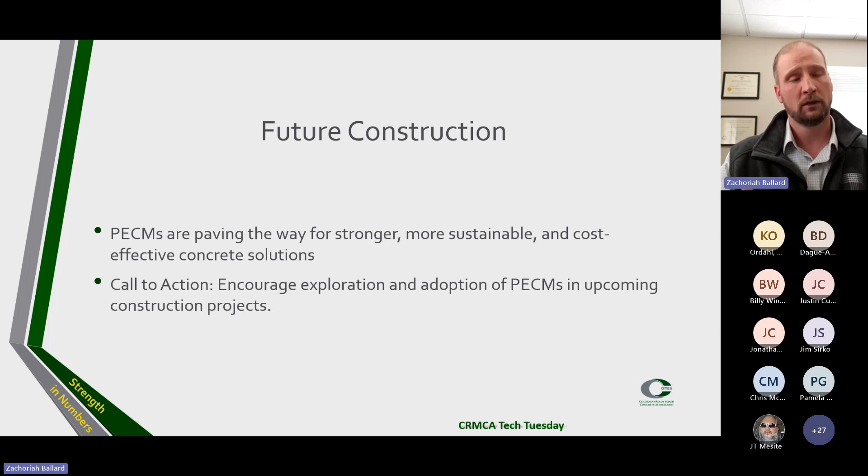So that is kind of assuming that, if you're a ready mix supplier, you get more than a couple weeks notice that you were awarded a project and have some time to work on some of these. We can also start getting a leg up on some of the mixes we're seeing based on historical data, where we're seeing reductions in global warming potential. We are seeing mixes that now have shrinkage requirements, durability requirements, whether that's permeability or et cetera. So we can start working on some of these mixes now and work on those projects in the moment, so that we've got something in hand to come to the table with for these projects, and potentially provide a value added service to these projects also.